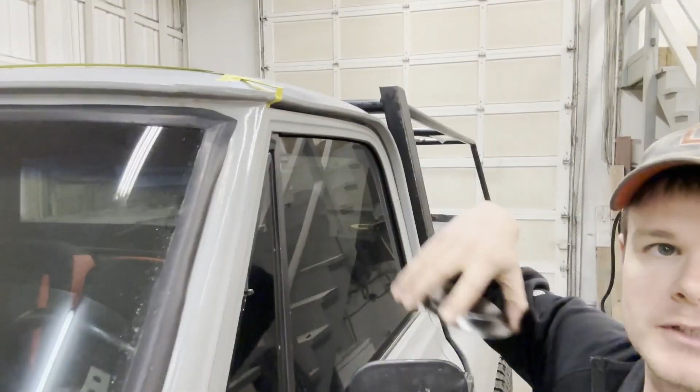So what I've come up with is a kit that will completely convert a non-cab-light roof, like this one, smooth, and add in these bumps. So here's what I mean. Up here is the smooth cab. I already have it kind of marked off, and we'll cover that in more detail. But the idea is to provide these raised bumps for the lights.

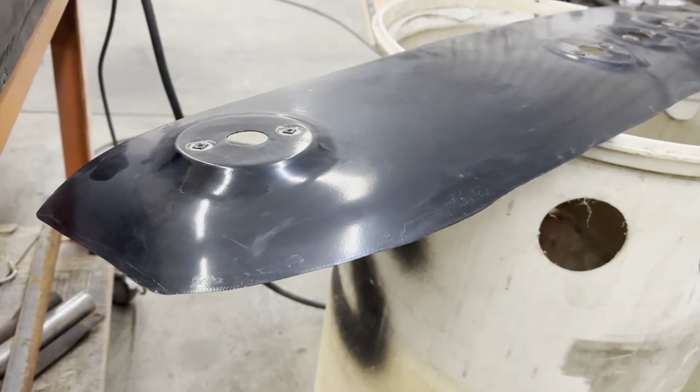So this is a smooth cab roof. It did not come with factory cab lights. And we're going to be putting these on. These represent the factory bumps that came in the cabs. I have a roof skin from a factory cab, and this is what I'm talking about. So this is the corner of the roof, not an entire skin, obviously. This was on the end of the cab, where it would be right in this area.

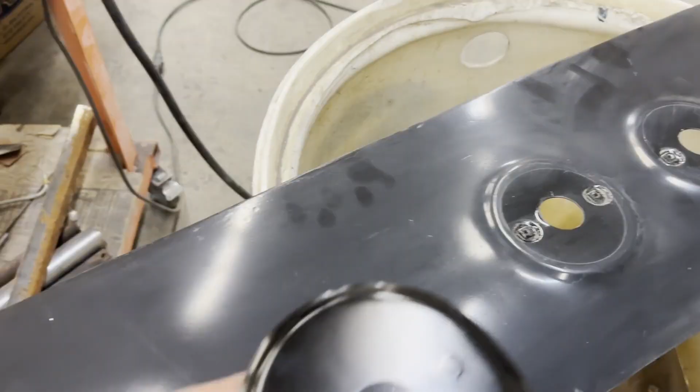And they came factory with 5 lights. Again, this was an option to select. It's really hard to find these cabs because it's a very rare option. So the idea here is that with the pieces I've made, they are going to help someone add this look onto their cab.

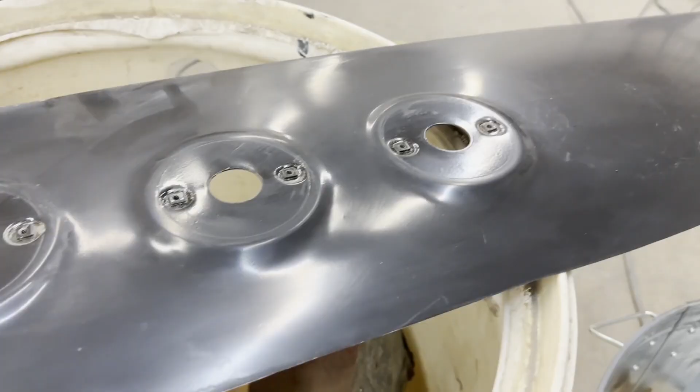So again, that's just a little backstory for those of you who aren't familiar with these cab lights. It's a pretty neat feature. But this video is intended mostly for the people who have already bought these kits. So without further ado, we're going to jump into where we can locate all 5 of the lights. I'm going to jump up into the truck.

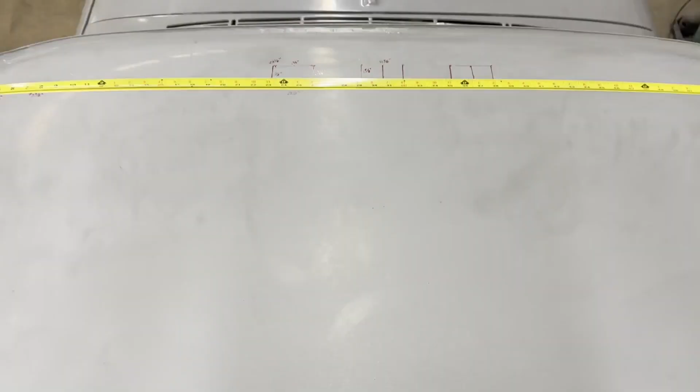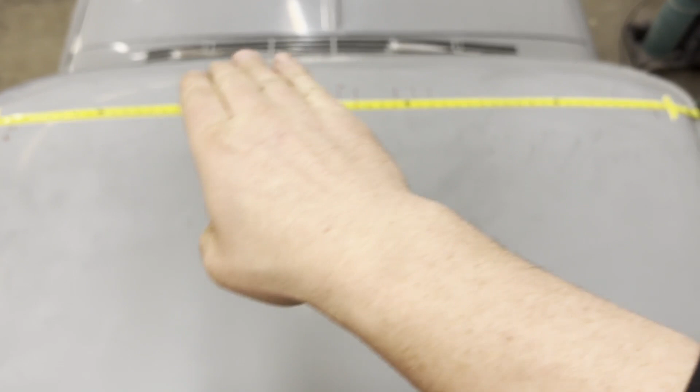Okay, fast forward a little bit. Here we are in the back of the truck. I put the roof skin that we were just looking at on top of the cab, and I was able to locate where each light was, just sitting on top of this roof. Now, this is measurement by a tape measure on a cab roof that curves side to side, and the front of the cab is also curved, so take these measurements with a grain of salt. I did the best that I could with what I had, but this is basically what I came up with.

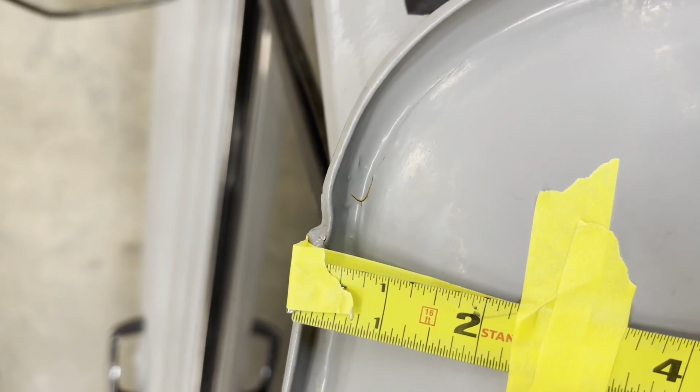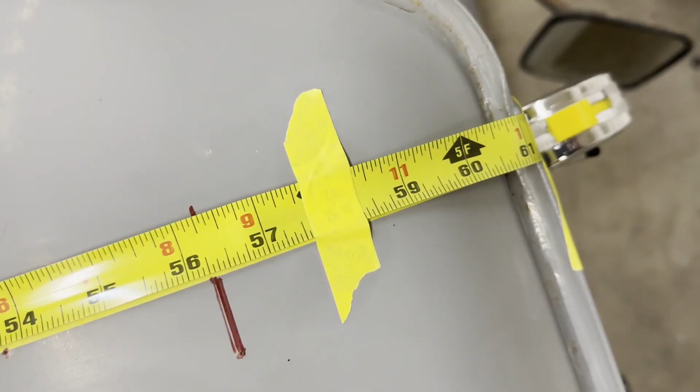I ran a tape line from the edge of the drip rail, the seam. Give you a little bit better view here. Don't mind my roof. So the front of the tape is attached to the front, to where that seam is on the drip rail, and I ran it all the way across to the front of that side. So that was to help give some form of a straight line for reference so that we can measure off of that.

Now, taking the holes I marked from the original cab light and measuring them on the actual tape that I put down, here's what I came up with. Again, this is very hard to measure with all the contours it has, but I feel like this is pretty accurate. If you run the tape from here to the middle, and then from that side back this way, you're gonna get a pretty accurate measurement. This is going to be kind of rough as it is, so take that with a grain of salt and keep that in mind.

But the first thing I did after I laid the tape down was figure out where the center of the roof is. It's kind of hard to see based on where you're at, but it's 31 5/8 inches, the halfway point on the roof side to side.

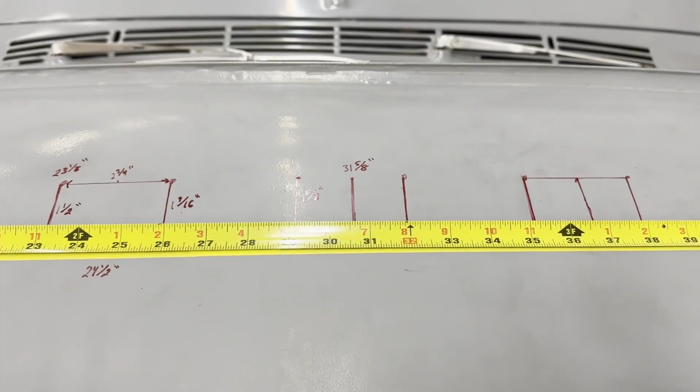And then from there, I was actually measuring from the center of the middle light to the center of this light. So from the center of the middle to the center of the second light closest to the middle is 6 1/16 inches. Again, that's center to center.

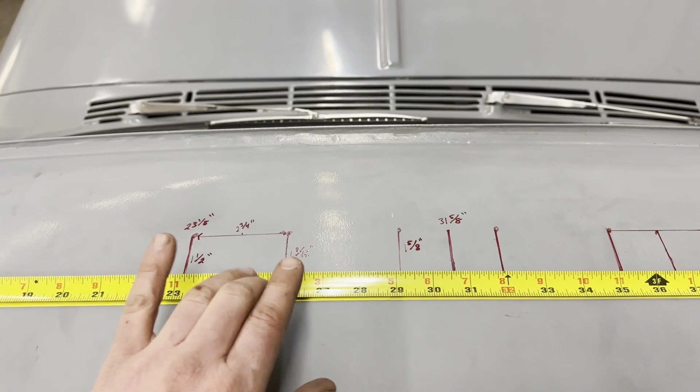And from there, the bolt pattern for the lamps themselves, the bolt pattern between the two holes is 2 3/4 inches. So you measure the center, and then you can measure out to the bolt patterns, so that way you know exactly where it's going to be located.

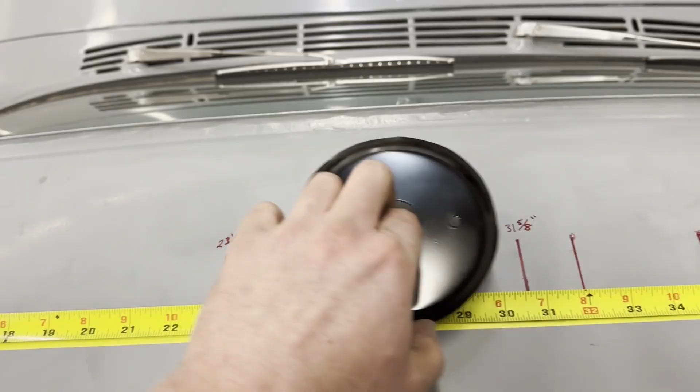And so these ones are relatively straight across. Again, I say relatively. I did measure from the tape line, the front edge, to the indent that I made from the original mounting holes. What I discovered was, for the middle light, one of the holes is 1 5/8 inches away from this tape.

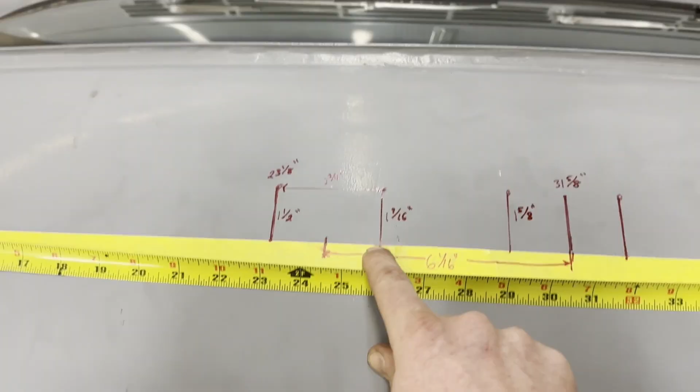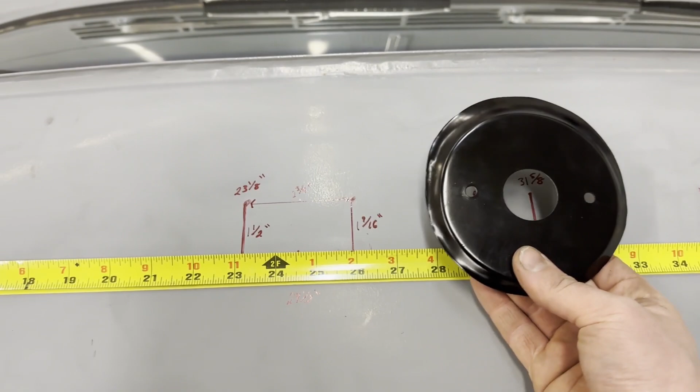And then the first next hole drilled would be 1 9/16 inch, and the next one would be 1 1/2 inches. So again, the middle is square to the front of the truck, and as you start to move to the side, they tend to turn just a little bit. I'm over exaggerating right now, just to give the idea. If you were to make all of these even, it probably would be fine, probably hard to see, but if you're going for that exact factory look, that's what I would do.

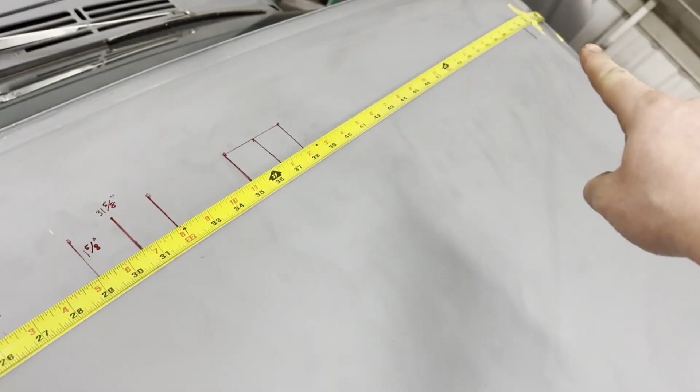And then the side pieces are even a little bit more tricky. Running the tape line, this is 1 inch thick tape that I used, and it just so happens that the inside mounting hole for this lamp actually touches the tape. It's like that on both ends, over there and right here. They both touch the tape.

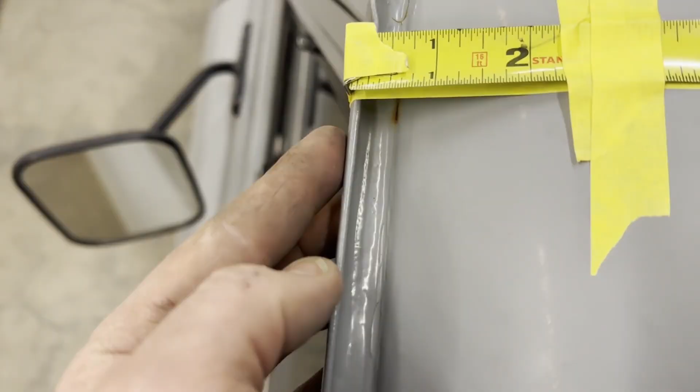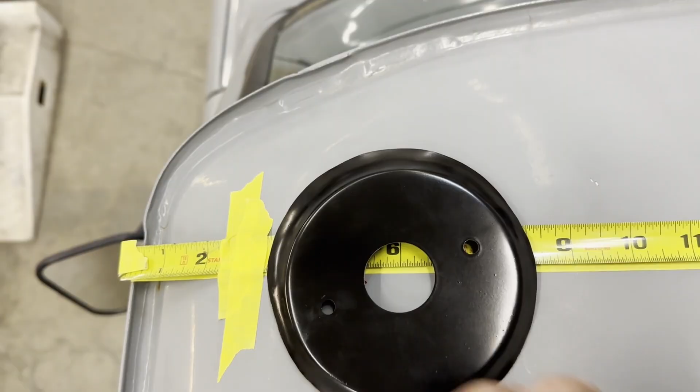And from the edge of the drip rail, again using a measuring tape that's kind of curved over and hooked, the measurement I got was 7 3/8 away, and it's kind of hard to see exactly. Now the very exterior hole, because these corner light lenses are actually very skewed going outward on the truck, they're not straight at all. They're very obviously turned, unlike those ones.

But again, the distance from this mounting hole to this mounting hole is 2 3/4, and this hole is actually 1 1/4 inches away from the tape. And from my measurement, I got 4 3/4 inches away from the drip rail.

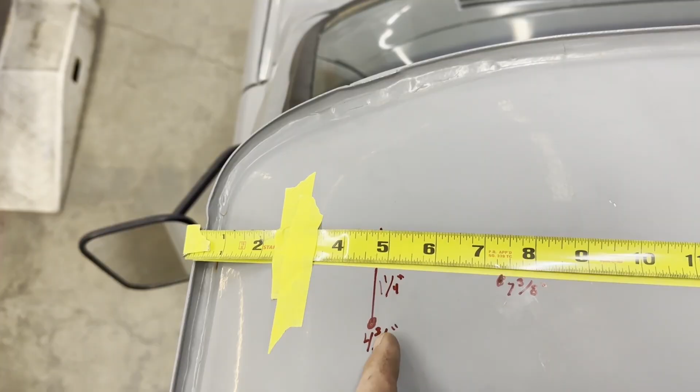So these outside bumps, I measured from the drip rail in, and on these three, I measured from center out.

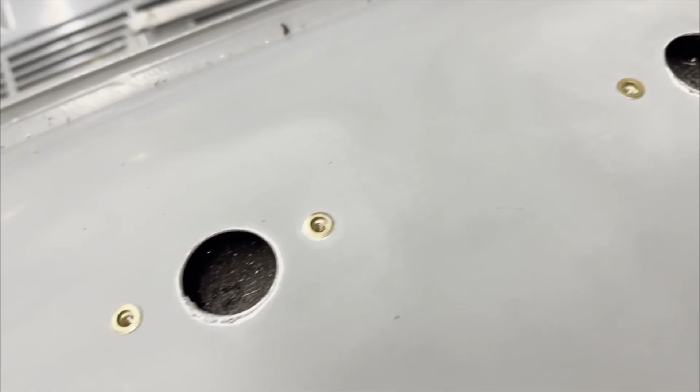Put some rivnuts in. Getting ready to use the mounting screws to clamp the part down with panel adhesive.

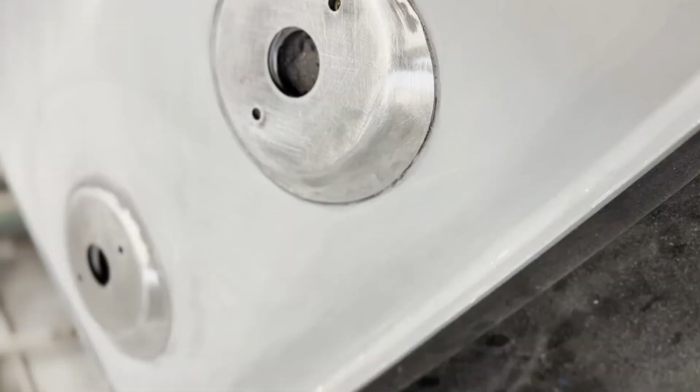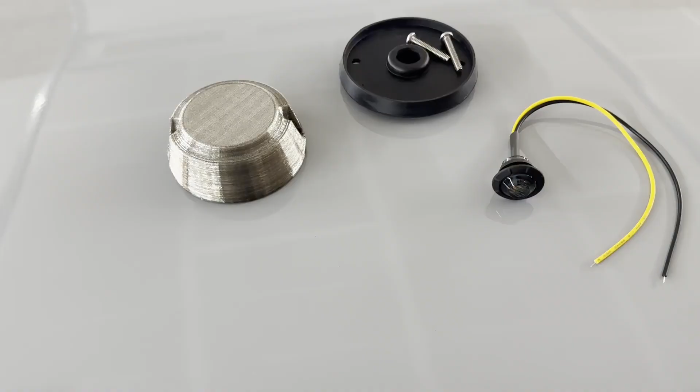So this is what you're going to get in the kit. You're going to get the sheet metal for the bumps that go onto the cab, a lens, the seal that goes between the lens and the bump, and mounting hardware. I do also have clips that these mount to that go inside the bumps.

They're not here at the moment, and I actually did something a little bit different in my application because there are so many different ways to do this. I am not going to be able to supply an ability for everyone to mount the same way that I did, but I am going to provide a way for you to mount these down.

And then also I am going to be using these 3/4 inch LED lights in order to light up the system. Now these are pretty cool because obviously I do not have an amber lens, but these 3/4 inch LED lights light up in an amber color.

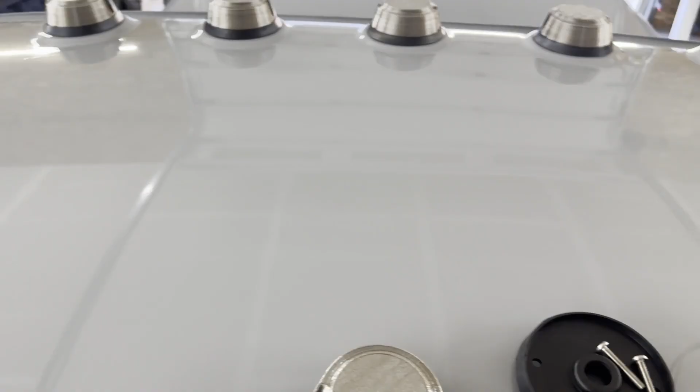And so my truck is painted gray. No, this is not a primer. I know it kind of looks like a primer. It wasn't the color I was expecting to have when I painted it.

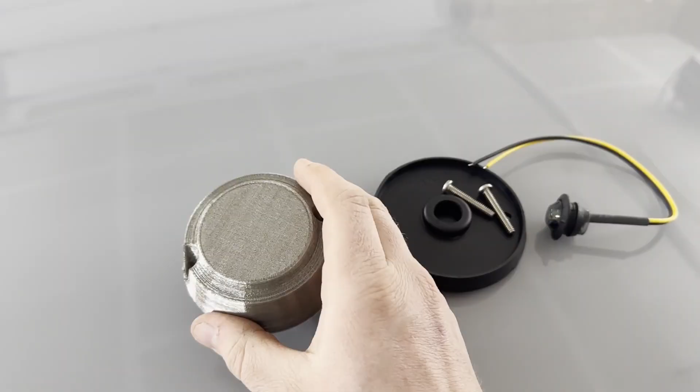So these lenses, they look a lot better on my truck than an orange tinted lens would. And so during the day, they're gonna have a nice color that matches my truck pretty well, a nice gray finish, smoked clear, if you will. And then at night, when I turn the lights on, they're actually going to show an amber color. So it kind of checks all the boxes, which is pretty neat.

And these lenses, let me get this hardware off. See if I can do this one-handed.

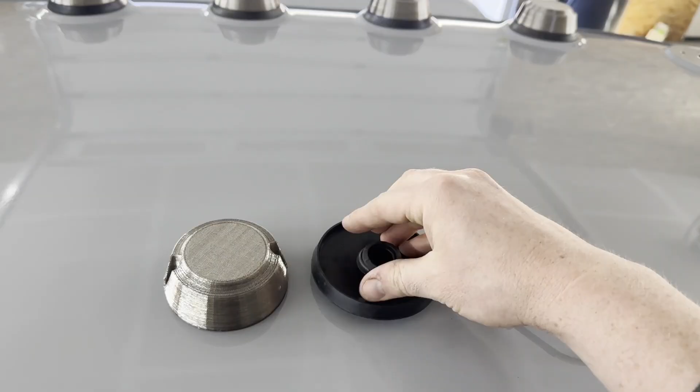Okay, so the way these are going to work is the grommet that comes with the light, you're actually going to be able to push this down. It's going to be a tight fit, but it is going to work. Fits in there like it was meant to be. And then the light itself is going to feed through the hole.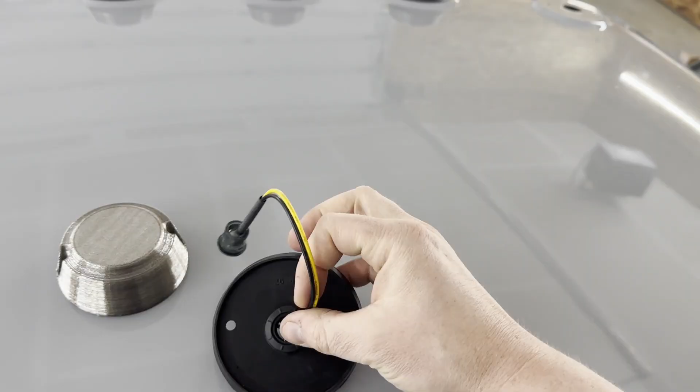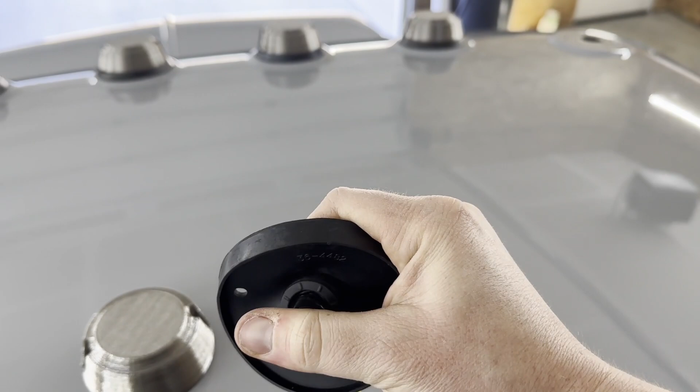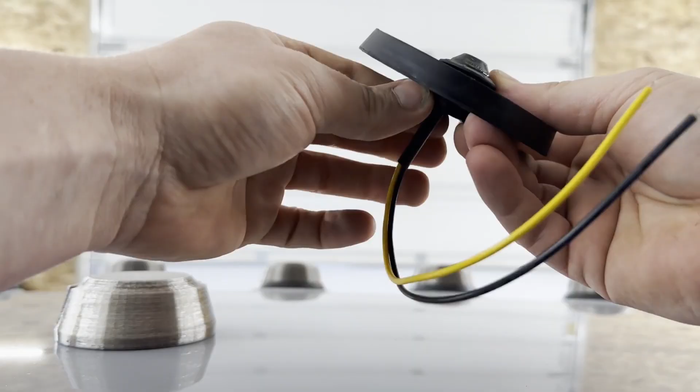And it's going to press in. It's just going to press inward. It is going to be very snug, which is good. So you know it's not going to go anywhere. And there you go.

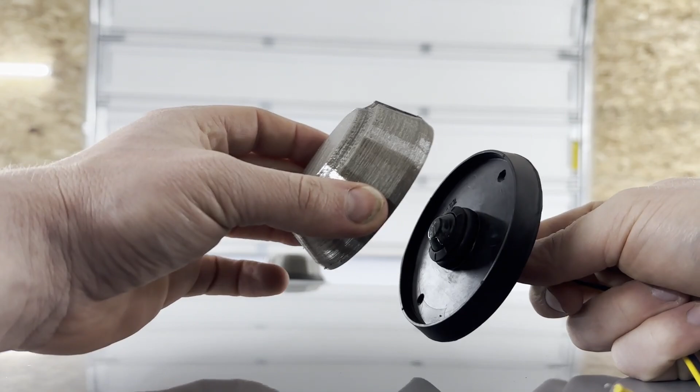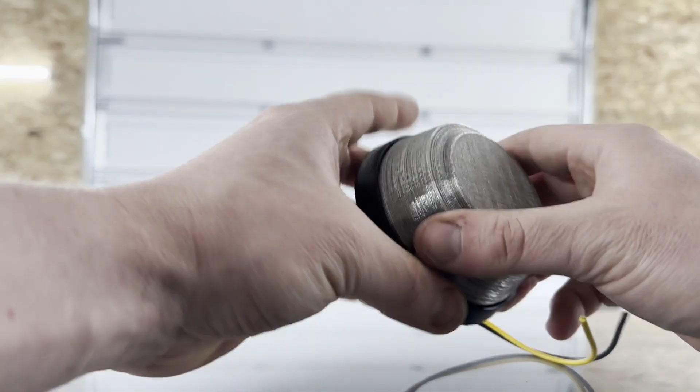So then the lens is going to fit on. And I do these lenses either in a normal clear, a smoked clear, which is like these guys, or obviously the most popular one is the most original look, and that is an orange or amber kind of lens.

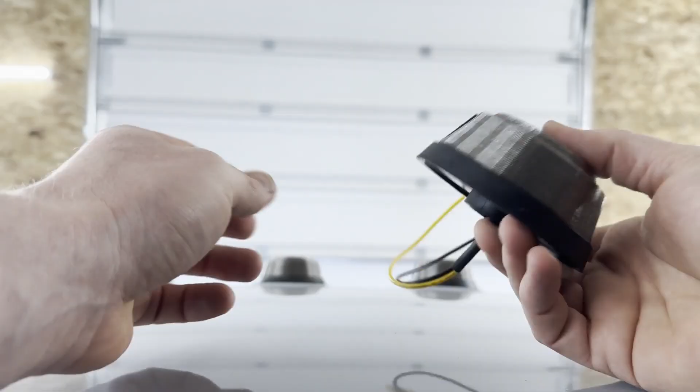But that's it. So now I need to go through and apply these. And you are going to have to figure out a wiring solution that goes from this part through the rest of the truck, because again, you can do that in a lot of different ways.

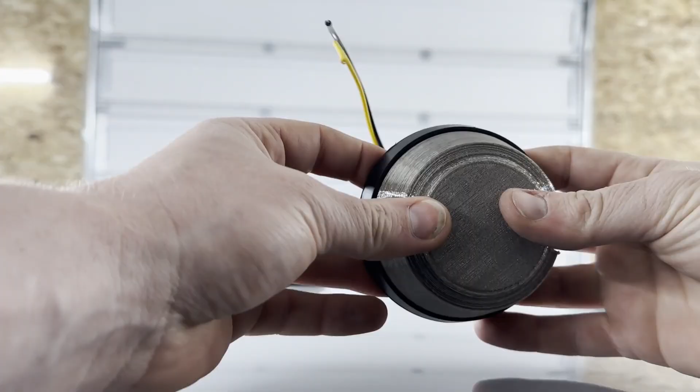And so this is a custom option for trucks. It's a product that hasn't been out there. And so there's a lot of different ways to do this, and I'm not going to stand in the way of the way you want to do it best. I am going to show you the way that I'm going to do it.

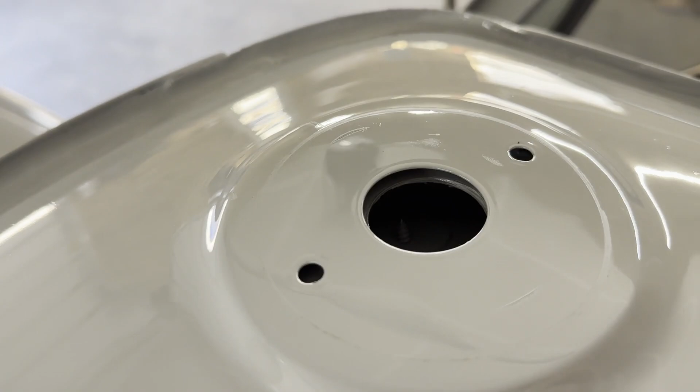So there you go. And then back to how I mounted this in a better explanation. So if you see they're inside, you have the bump here, and inside of it, this is actually, you can see the ridge of the original roof. So I didn't cut that up.

All I did was I drilled a bigger hole there, and then I drilled the 2 holes to mount the bumps. And when I panel adhesive it, the bump, I put it down, and then I put the bolts through the holes and mounted them to the rivnuts.

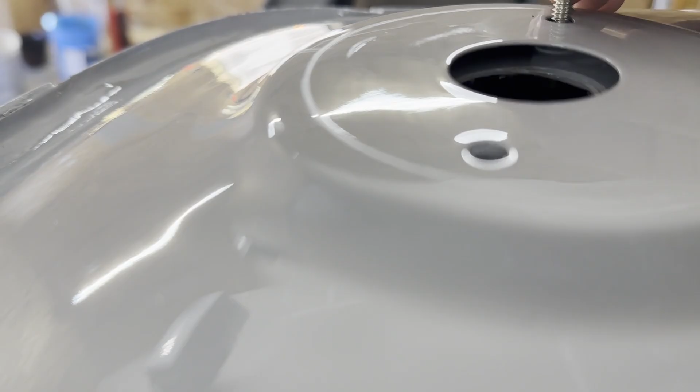And I don't know if you can actually see the rivnuts. I put the bolt down. So you can kind of see the very edge of the rivnut just below my thumb there. Right there, that's the ridge of the rivnut.

But I'm going to be supplying clips that actually work with the new bump, in case you want to cut out the entire hole to mount the bump to the actual sheet metal of the cab, you can do that. You can panel adhesive it the way I did it. You can take this piece and weld it to the cab. You got a lot of different options. So either you or your body guy can definitely make these work.

So I'm going to go ahead, I'm going to remove the rest of these lenses so I can get this wiring done.

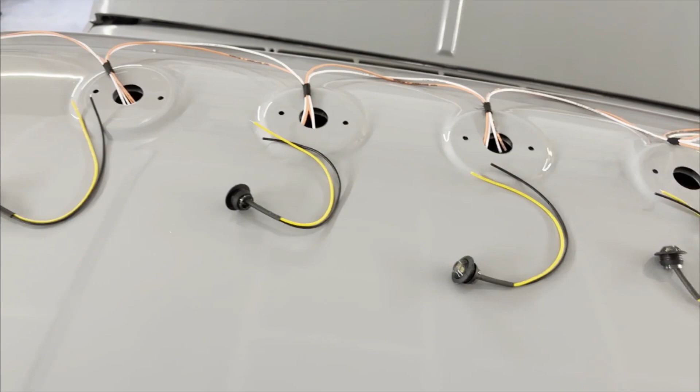Alright, so that's kind of what I'm thinking for the wiring. This is just to show what it looks like before I fish it through the cab. The orange wire is going to be my hot, the white wire is going to be the ground. I'm going to wire this into the factory headlight switch so that when the parking lights come on, so do these cab lights, clearance lights, whatever you want to call them. And I'm just going to directly wire these light bulbs into the wiring harnesses, because I'm not planning on taking any of this out anytime soon.

These are LEDs, so they draw extremely low current, and they should last a very long time. And if they ever fail on me, then I guess I will have to deal with that when I get there. But I'm just trying to save on how many connections I have.

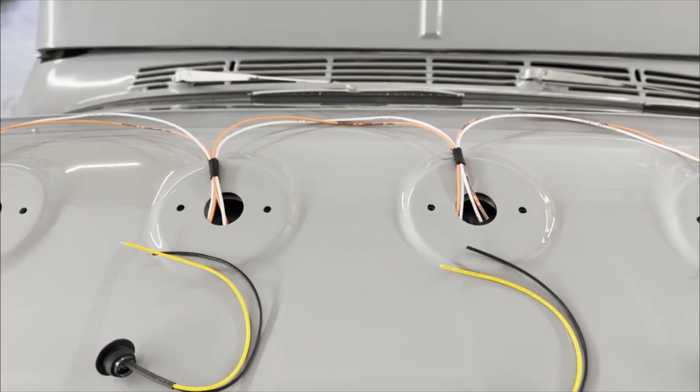I gave myself enough space with each wire, enough room, enough length, so that I can fish it through the cab and keep pulling them up one at a time as I go along, so that I have enough to work with. You don't want to give yourself too little wire, but you can give yourself a little too much and figure it out as you go.

And that should work. Here we are on the best workbench in the shop, the truck's tailgate. We've got to remove all the grommets off of the lights.

And we put everything together. I am using these connectors because they heat shrink, and that will keep the connection between these wires and the wiring harness together and sealed away. I don't expect any moisture to get into the cab lights, but if it ever does, I do not want it to short out and cause an electrical problem where I'm not aware of it.

And to hold everything together, I'm just using this fabric tape. It works really well, it tears easily. And then I'm actually going to put a whole wire loom on this to keep it even more protected.

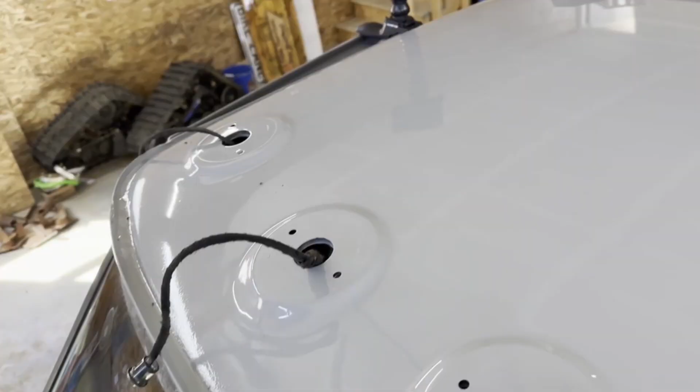Okay, so there we have it. We have all of the lights in the harness routed. That was a really fun chore. So I'm going to recommend, I think I did this wrong.

Before you even decide to put the bumps on, and if you're going to put rivnuts in the original sheet metal like I did, if you can see it - so that underneath is the original sheet metal, and then I put rivnuts into that.

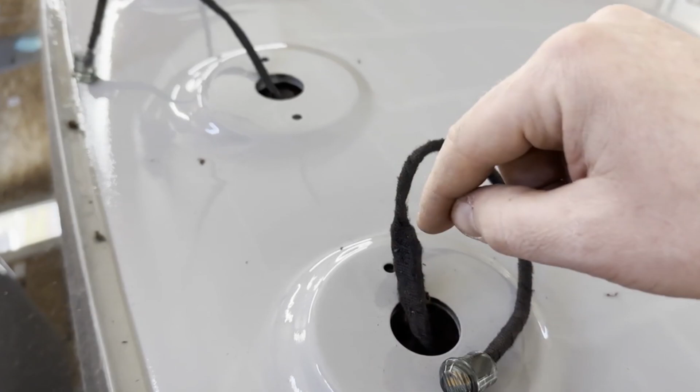And even before I'd get to that step, I would do all the routing of the wiring harness, because the rivnuts stick down through the cab, and so the wiring harness likes to get tied up on that going across. And so on the far side, on the passenger side, I threw a fishing line in, routed it

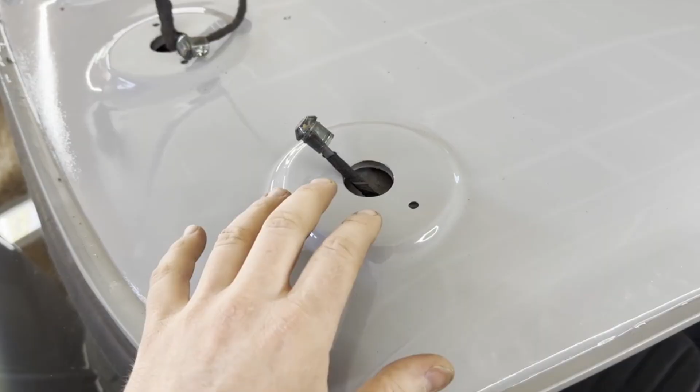across to the driver's side corner, and then from there, I pulled all the harnesses through, pulled them all out, made myself a little wire hook, and then back on the driver's side to get it down into the cab to hook up to power, I tied the end of the wiring harness to the fishing line again and routed

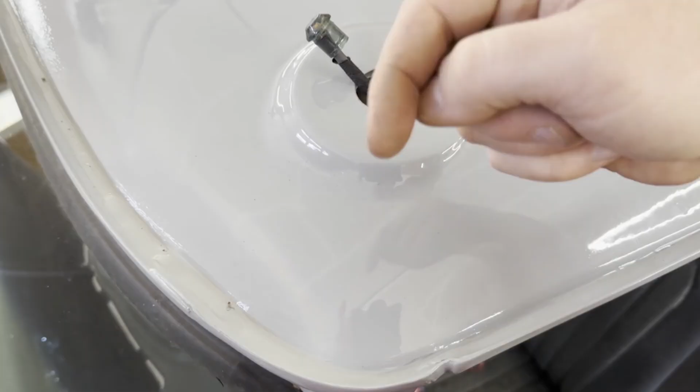it through. There's going underneath here, there's a substructure kind of right here, and you want to be able to feed the fishing line over that. And then about here-ish, there is a hole that goes down the A-pillar. So you run the fishing line tied to the wire, and you push the wire through the A-pillar, down,

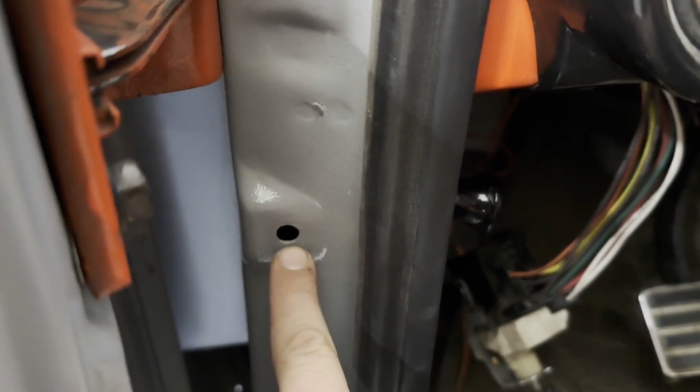all the way through. And then this is - I currently do not have my courtesy light switch in, and the wiring harness for that routes through a hole that's right here. And I drilled an oversized hole for that, and that's where the wires pop out.

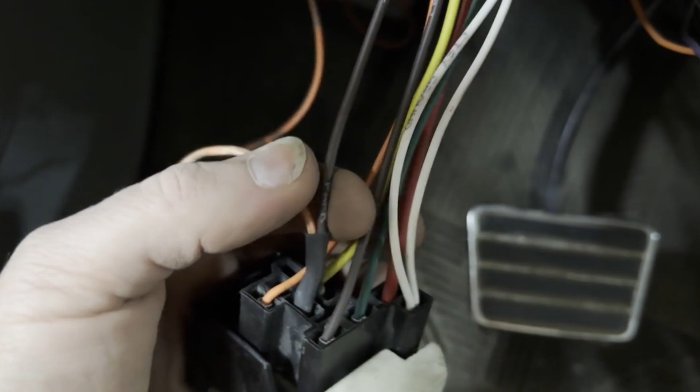Now the white one here is the ground, so I'm going to ground it probably right here. I already have the screws out. And then the orange line is key-on power to the parking light switch. Tied the hot wire to an actual parking light socket. So it's one of these two brown ones in the connector.

And now, when I turn just the parking lights on, it's hanging down from the outside, but there